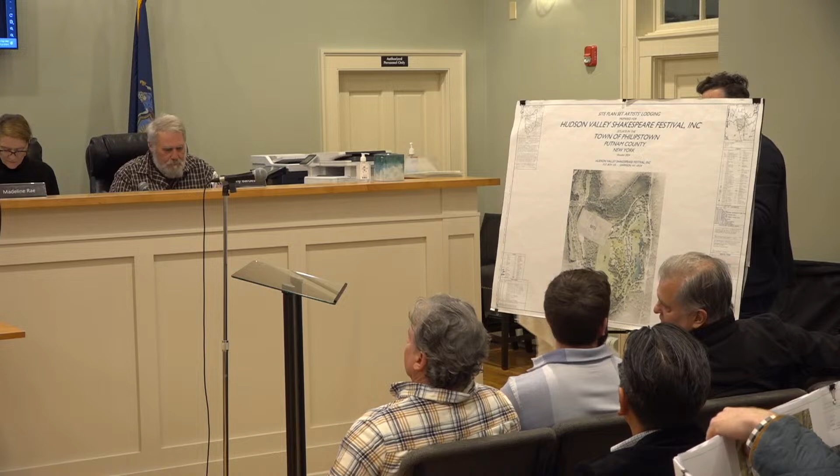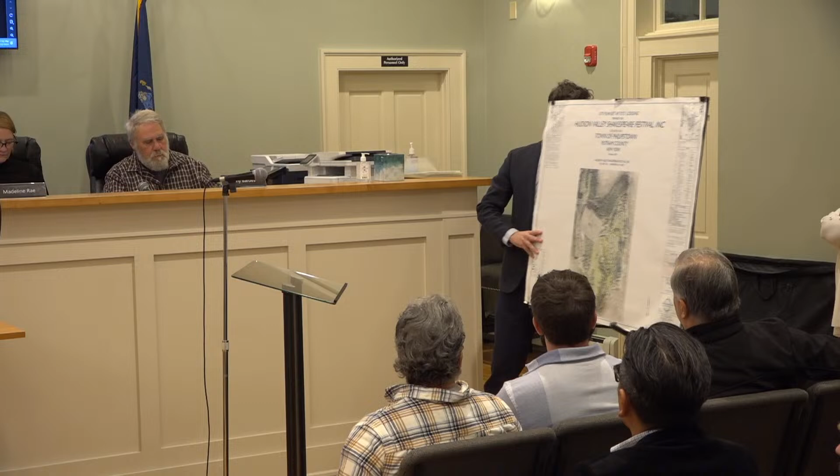What's being proposed is 32 units of artist and guest lodging. There's no conservation board jurisdiction. I think the planning board just wanted to make sure that you guys were kept apprised of what's going on site.

This is the area of the theater being built over here. This area over here, and I have a blow up of it, is where the artist lodging is going to be built. It's 32 units in 5 buildings. Just to orient you, this is Snake Hill Road here and Philipse Brook Road here.

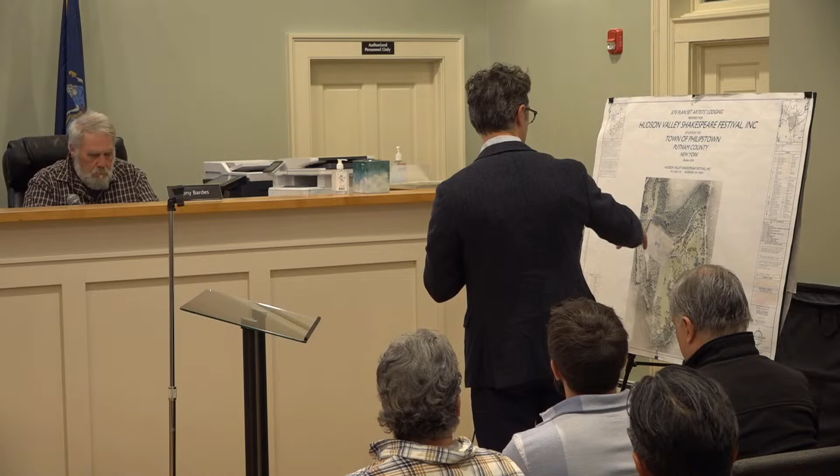So what's being proposed here are 16 units of lodging in a 2-story building here, and then 4 units each for another 16 units in these 4 buildings here. This is all being proposed on a former fairway, so there's no real additional disturbance associated with this part of the property. So again, just to orient, this is north this way.

Snake Hill Road's over here. Snake Hill is to the left. Yes, to the west. So are there any questions? You took the words out of my mouth. Does anybody have any questions?

No disturbance, is there tree cutting that's going to be in addition? I believe there are 2 trees planned to be cut as part of this construction, and 32 are being planted. But it was proposed for an area of the site that was already disturbed at the fairway.

And it's pretty far off the road. You can see that there's a slope down this way that leads down, and there's pretty heavy tree cover that separates this area from the neighboring properties. So most likely this is not going to be visible from Snake Hill Road.

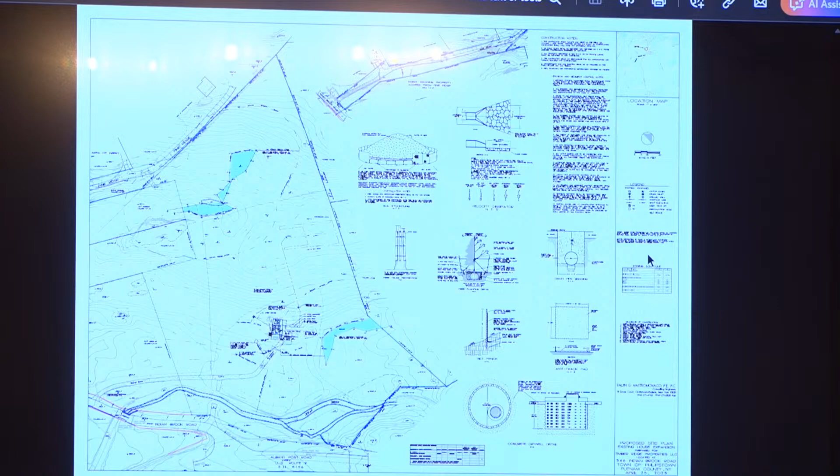The first application, or wetlands permit, is the map displayed for an existing residential house. The house is under renovation, and as part of that they need to do exterior work on the property. The work would be within a wetlands buffer, and the impact to the buffer at the existing house is approximately 3,300 square feet of disturbance. That would include where an existing septic currently lies, and where the existing house is. So they are basically working within the confines of the previous disturbance, but upgrading the property.

Okay, now, other than the septic, what else? I was unclear looking at the application. What else is being done to the house?

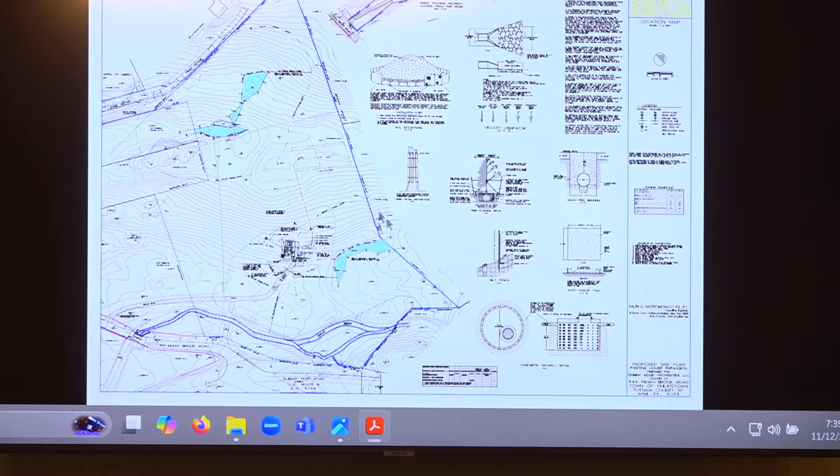So the existing residence has been expanded. The foundation has been expanded slightly. There's been some exterior improvements, like a patio, and other improvements made. A lot of it was old and decrepit, so they're basically trying to upgrade the outside as well as the inside of the property. But it all is within the proximity and within the previous disturbed areas on the property for the existing house.

So there's no expansion of the footprint of the existing house? There is some expansion, minor, of the existing house. They're putting a second story on it, but I believe some of the perimeter walls are being improved upon due to the age of the property. It's a very old house. But it's not a significant increase in the footprint. It's more they're going up, but there is some exterior expansion.

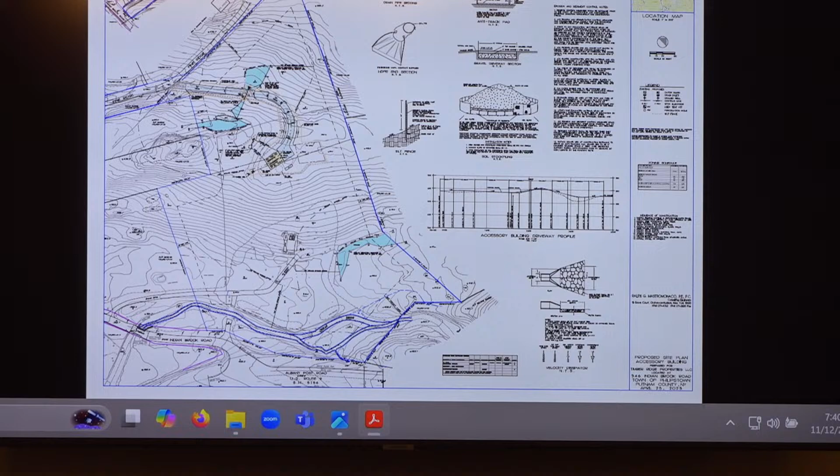Now, the second application before the board is for an accessory building, shown on the currently displayed map. The accessory building has additional impact due to the installation of a gravel driveway, and the driveway crosses an intermittent drainage channel, which will be crossed with a culvert. The impact on the accessory building is approximately 346 square feet of wetlands disturbance and 11,300 square feet of buffer disturbance.

The two, you can see on that plan, are in relationship to each other, one sitting at a higher elevation than the existing house, but they are both on the same tax lot.

So I think we were here before the board to progress the project, to see if we could schedule the board to make a site inspection. We need a site visit.

And the other thing is, lack of a better term for it, I'm assuming the property goes further this way, to the north on the map. There's a- it basically goes further to the north. To the south, to the south, yes. Because I don't know how everybody else feels.

I'd love to see - you're basically building a new driveway on a private road that I assume the property owners own in its entirety, but I think that needs to be shown. It actually is shown. If you see the way the map is described, the tail end, this is the insert at the top? That's correct, yeah, that's the extension, but the bulk of the property is shown on the left. Yeah, I see that. You can just see where the match line would line up. Yeah, it's not particularly clear.

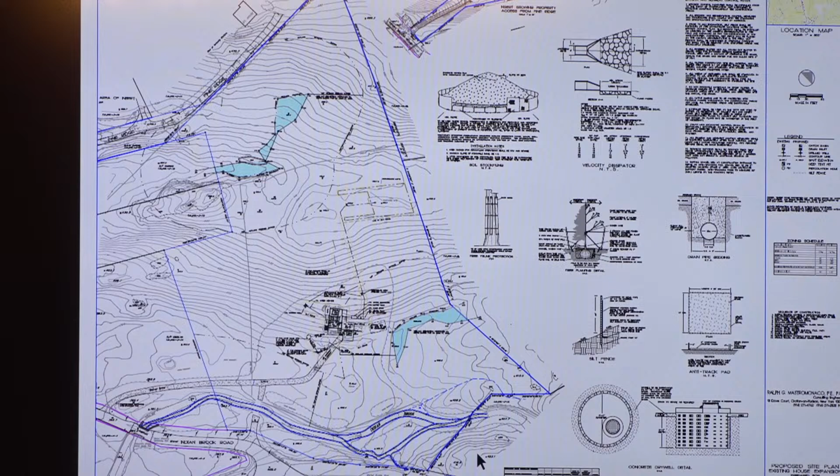Could I ask, is it possible to get copies of this with the type about three times bigger? Yeah, I mean, I'm old, but I don't think I'm that old. As much as we don't like wasting paper, we are used to seeing full-size plans. We certainly could provide that. I think that's important. We need to do a site visit.

And also, my eyes are pretty good, but it's really hard to tell if everything is on this plan that needs to be. I have a feeling it is once we see it blown up, but in terms of silt protection and so on, if we had a bigger plan, we'd be able to see that.

No, that... Okay, so we do have one set of plans.

Member Bardes had asked if the access road was going through another property, but in fact Pine Ridge Road is owned by the applicant. Pine Ridge Road also goes into Indian Brook, ultimately, intersecting at Indian Brook Road.

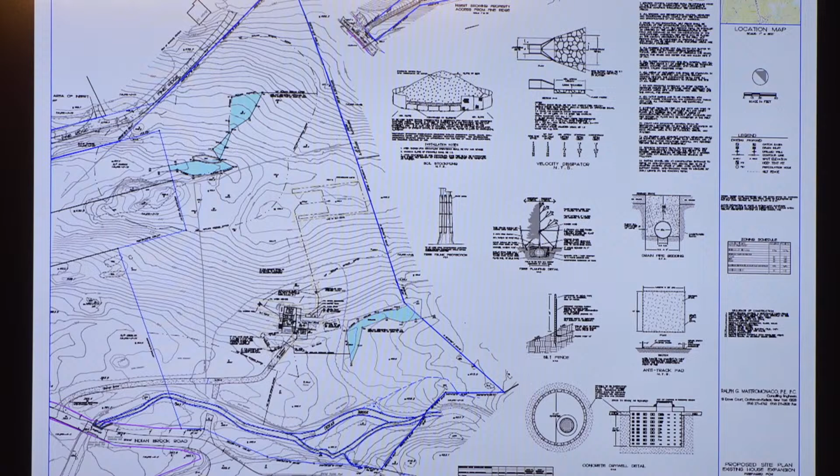Okay, so we have one set of full plans, which is from the old one. So I don't know what comments or questions there are, but I do think this begs a site visit. I believe, Max, you had told me that everything has been staked out?

Yeah, I went over to the property on Saturday and met with the owners preliminarily to look at the layout and kind of give them an understanding of how the process would go before the board.

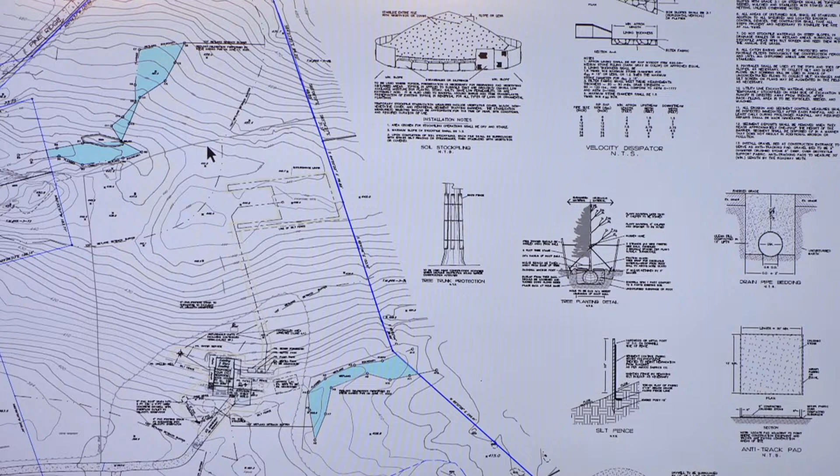So I think maybe now would be a good time, if you have anything else to add or would like to share with the board in terms of the intentions of the property and what the accessory building would be utilized for. I think those would be good things to keep the board informed about, if there's any other information regarding that.

Yeah. So, as you see, there are 2 brothers that own the property jointly. Their intention is to develop it to have 2 living quarters on the property, one of them existing and then one of them proposed.

The proposed building, the new one, is proposed to be just a 2-bedroom loft with a garage underneath, similar to like a small barn. That's actually the style, so it would complement the main house. It would look like an accessory building on the property.

Due to the grade change from the existing house to the level area up top, they found it prudent to include the access off of Pine Ridge, as opposed to trying to navigate the steep slopes on the property.

So that was the concept, and the fact that it looks like a relatively easy access, with focus on the environmental crossing of the intermittent channel. We believe that it would make the most sense to access it in that manner.

Now, is there going to be some form of at least pedestrian egress between the existing residence and this new residence? As of yet, that hasn't been an issue that came up. They're young and active, maybe they don't want it to be too close for comfort, but if in fact that is a plan, then we would reflect that on a site plan. Right now, there isn't any intent to do that.

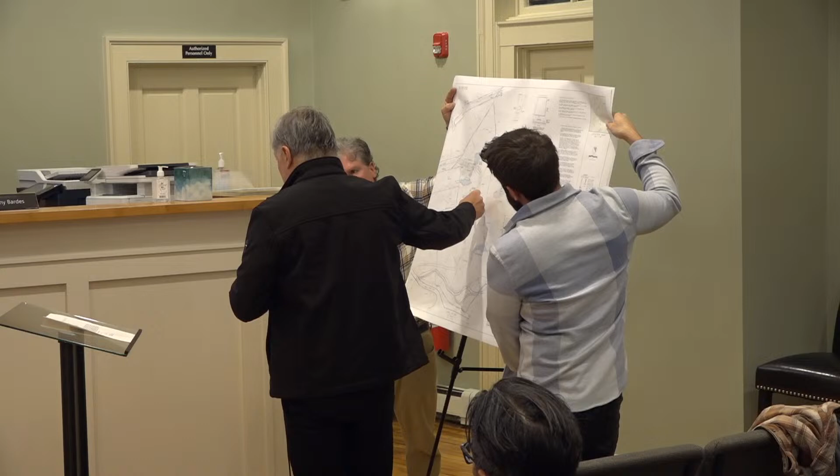At that location there's a proposal to include both a septic for the accessory building as well as the septic for the existing dwelling, which sits at the bottom of the hill. The septic currently has to pump up the hill, and it currently sits within a wetland setback buffer. It'll be eliminated and relocated up on top of the hill.

However, there are improvements taking place within the buffer for the existing house, including a patio, a portion of the foundation, and a septic tank, but that's minimal work down at the existing house, which sits closer to Indian Brook Road and Route 9.

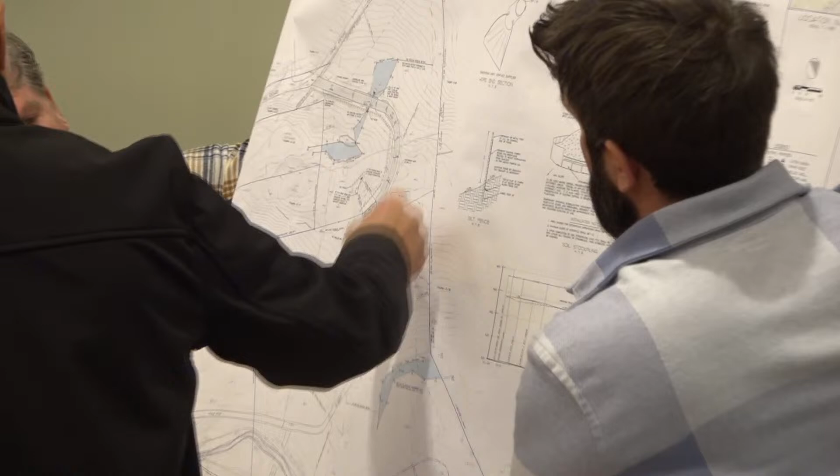At the top of the hill, we have the new proposal. All of the improvements here are new, including the driveway, the two-bedroom accessory barn-type building with a garage below, and a small— Is that a separate lot up there with that blue line that goes right through the house?

No, above that's only a setback line. Okay, so it's all part of one lot. Yes, it's all part of one lot.

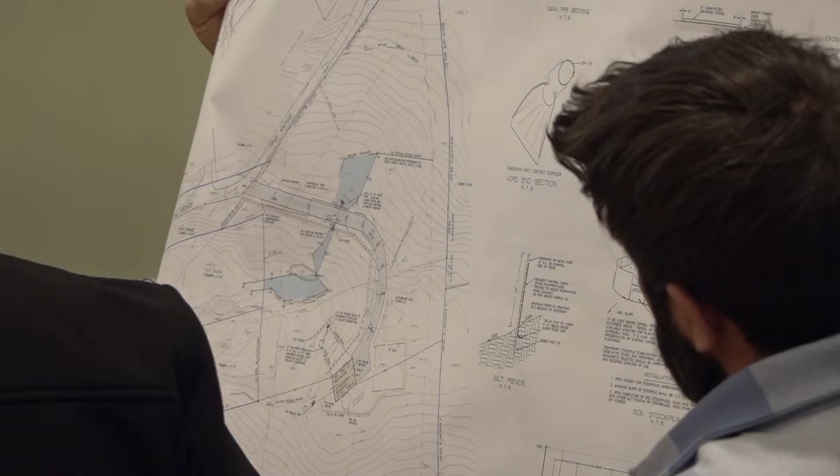The acreage is 7.2 acres on that particular lot, and the reason we're here before the board is partially because of the wetland crossing here. This crossing is where the driveway will come over, and we're installing a culvert pipe, and we will divert the water beyond it, and it runs down to a lower wetlands that feeds back off the property.

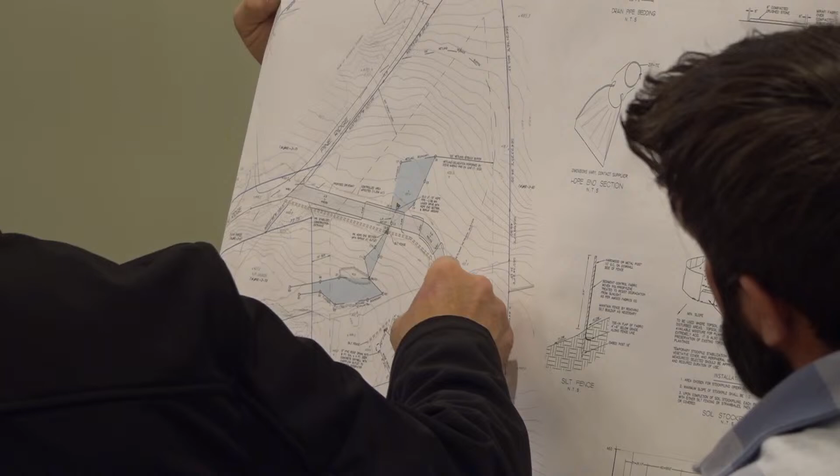So the improvements to the house and to most of the driveway are outside of that area, but there is that portion of crossing that requires us to be before the board. But it's not improvements to a house, because that's gonna be a new house, right? So that's outside. The improvements that are within the buffer include the driveway and a culvert crossing pipe.

And approximately 3,200 square feet of buffer disturbance for the accessory building. And how big is the accessory building? I asked before but I didn't hear. I think it's approximately about a 40 by 27, not gonna exceed 1,000 square foot.

Right, 1,000 square feet. And with the health department, are they okay with that septic design you got there? So the health department has reviewed the application, and they've provided us with a letter stating that the review has been completed, and upon receipt of a wetlands permit from the town, they will issue the septic approval. That's the protocol that they follow.

We gotta go there. So I'm just looking at the contours of the driveway. It looks to me that at worst we're on steep one category, steep slopes. No, it's not. There's a driveway profile, note. The grades are from 1% as steep as 8% for one small portion.

But basically what's happening here is the hill's going up, we're traversing the hillside, so we're running at a relatively level grade until we come around the bend, and then we climb up a little bit, which is represented there.

So we tried to work within the setbacks, which we do not require a variance for, but we do have to get your permission to allow us to put additional footings to build this deck.

So the disturbance is about 82 square feet, which entails a small patio at the bottom. That will be about 395 cubic feet of disturbance. In reality, it's just the disturbance of the footings, so we're talking about 9 or 10 footings that will have to be placed.

So that's the ask for tonight, if you guys will be able to modify our previous approval from two years ago.

Yeah, just refresh my memory, I remember doing a site visit there. Originally, they were going to extend the house slightly, if my memory serves me. So more or less on the front, we were going to be squaring off the front entrance, expanding that, creating a portico. And in the back we were creating a suite.

So we were extending about 9 feet, plus the width of about 20 feet on the back, I believe. I apologize, I printed this out today just to give you an idea of what was proposed, so you don't have that in the presentation. That's on me, unfortunately, I'm sorry.

This is, the yellow portion is what was approved previously. What you have in front of you now is pretty much a lot less, which should be in either the first or second page for you guys. That's the site plan, and the other one is just showing the footing locations. Just to give you an idea, again no addition, but just more of an outdoor space area to the house itself. And the entire house, if my memory serves, is within a wetland buffer.

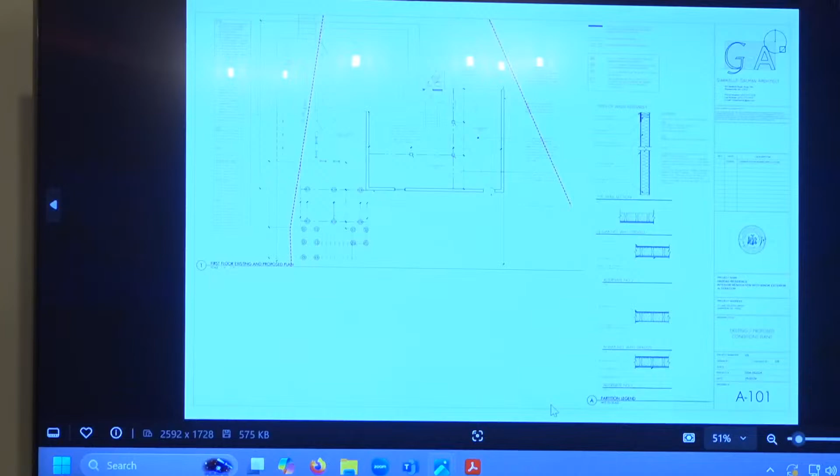Did the board propose any mitigation requirements for the project? The only one we had, and we wanted to keep, if it's up to you, we had a swale that we were creating, and we can definitely replicate that. We want to keep that as part of the approval. It's not reflected in here, but it's also part of the previous approval we obtained.

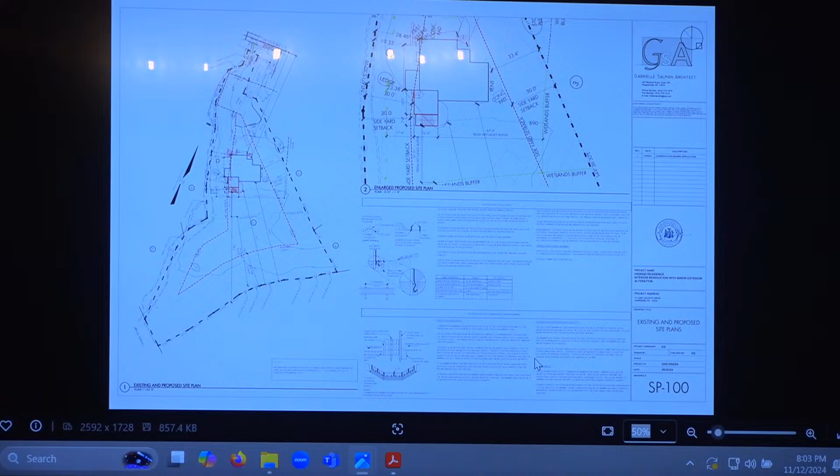So swale, remind me, it's pretty much just more like a green garden in a way. Was it a rain garden that we had proposed? Correct. And that's the green line in here that was part of what was previously approved. We wanted to keep that, that's the reason we didn't include it in here. We're not deviating from what was done previously.

So this is an interesting issue, I won't say a problem. I think we need plans that merge what was going to be done in terms of mitigation with this. And I think also the area of disturbance, to me, is the full deck, not just where the footings are going, because you are covering over the land itself. Even though the patio was part of the previous approval? Okay, yeah.

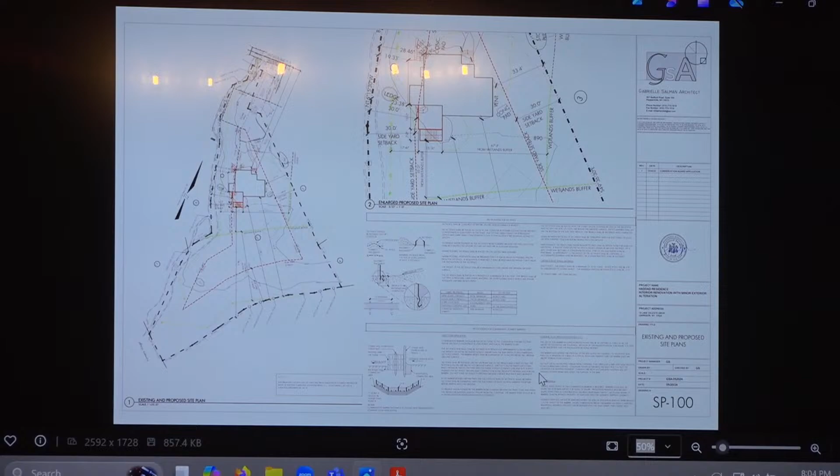Because basically we're getting rid of the old plan, it has to be a new application, right? But what I'd like to see is what was incorporated, so we're not taking anything for granted in terms of mitigation on the new plan. That make sense? So overall, the square footage of disturbance is less.

Right? For me, disturbance is what you have, and that's something you and I talked about last time, so just for my clarification - disturbance last time on this project was what we are excavating and what we are controlling. Right now, the disturbance is literally just the footings, not the deck itself.

So when I do the revised application, which we did, I just have to provide the additional plan. So you want me to include the deck, which will be an additional square footage to the disturbance, even though that's not being excavated - just because it's being covered.

Is the deck a similar square footage to the addition that was proposed previously? It's actually less. So I think that needs to speak to Andy's point - to show that the mitigations we were comfortable with moving forward with a larger square footage of disturbance will still be proposed to deal with less disturbance overall, even though you're only considering the footings as the disturbance, we're creating that whole footprint of the deck space.

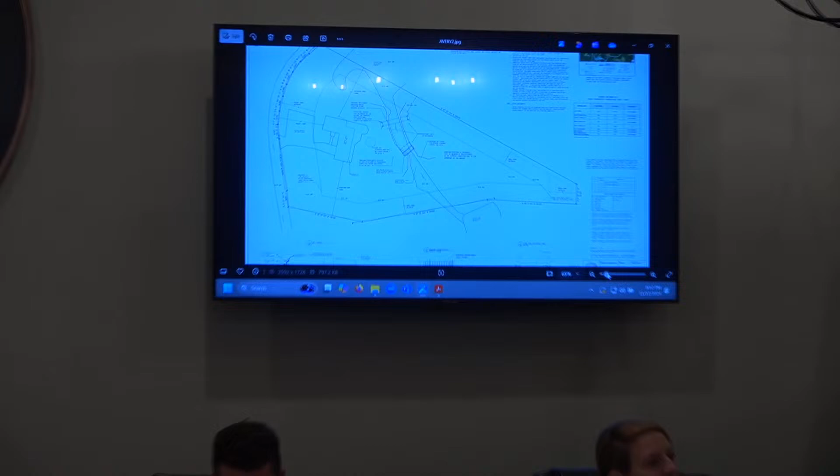It seems as if maybe the whole system was man-made at one point. The DEC doesn't even have it on any of their maps. I called the DEC and reached out to them specifically, and they said it's not a regulated stream. I've been there, and the stream itself doesn't really seem to be flowing at an incredible rate. I'm sure when it rains, maybe there's some flow.

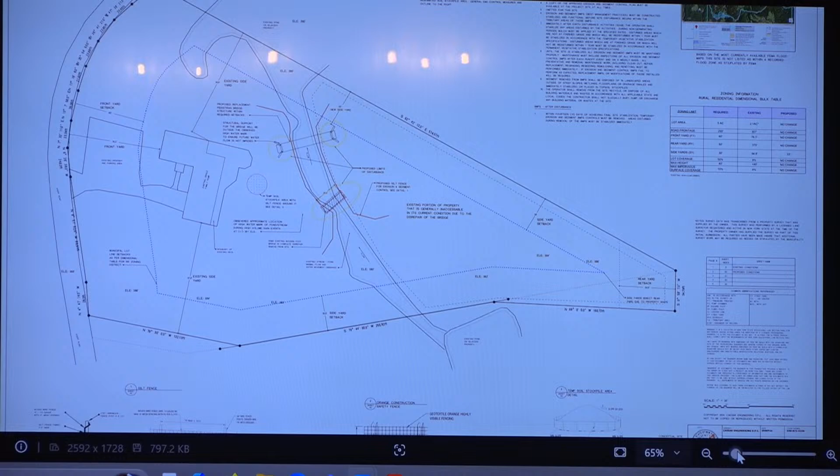Generally the flow seems to be from this side to this side, but that's really the situation. The existing bridge is not really passable with any respect. The property owners, for all intents and purposes, don't have access to the back of their property because of this bridge that's basically falling into the stream. The condition of the bridge is such that it actually impedes the flow of the water.

It's kind of an issue, and when the water floods, this is actually not in a FEMA floodplain because it's not really an observed or tracked water body, but the general 100-year flood zone, just from the property owner's personal experience, is roughly at 381 feet, just meandering around here. When the bridge backs up, it causes more of an issue.

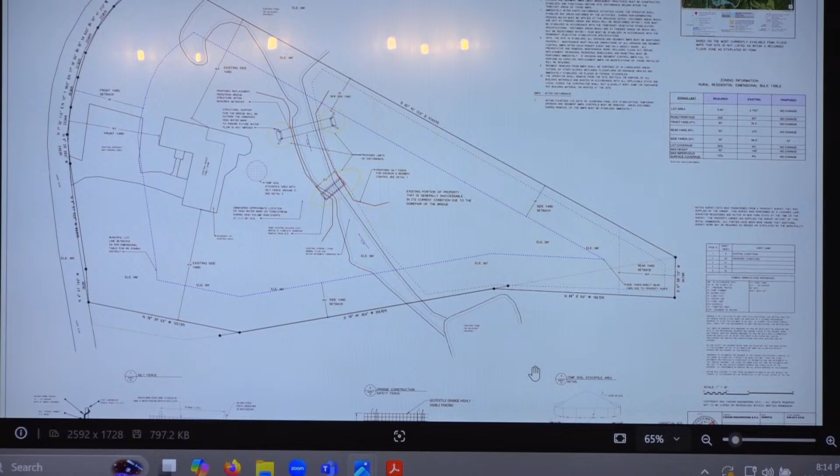So the general proposal here is simply to remove the existing bridge, relocate it above the observed floodplain, in this general area within the setbacks. The intention is to perform all excavation activities outside of the boundaries of the physical water body. So we would be basically pushing the bridge piers out probably 10 feet from the mean high water mark on each side, putting in 2 footings on each side and then putting a steel girder.

The intention is for it to just be a pedestrian bridge. There's no intention for vehicular traffic or anything like that, but the property owners basically just want access to the opposite end of their property, which currently is inaccessible. So the new bridge is being moved because you want to put it in an area where the stream is not constricted. Yes, we don't want it— the grade is such that there's kind of a little knoll here, and it's a particularly convenient location to set the bridge up higher.

So we're basically trying to get 3 foot of freeboard above the existing water mark, so that if there's a flood stage event, the water is not being constricted by the bridge at all. So the intention here is to really remove an impediment from the stream and make sure that whatever bridge is there is basically not interfering with the water flow in the future.

Where's the proposed moving bridge? The existing bridge is here, and the newly proposed feature is just basically 30 foot next to it. And I'm guessing that the width of the bridge now, the new bridge would be about 10 feet? The width of it, yeah, it's gonna be like 4 foot. Okay, because if I'm using it to scale, it's much wider than that.

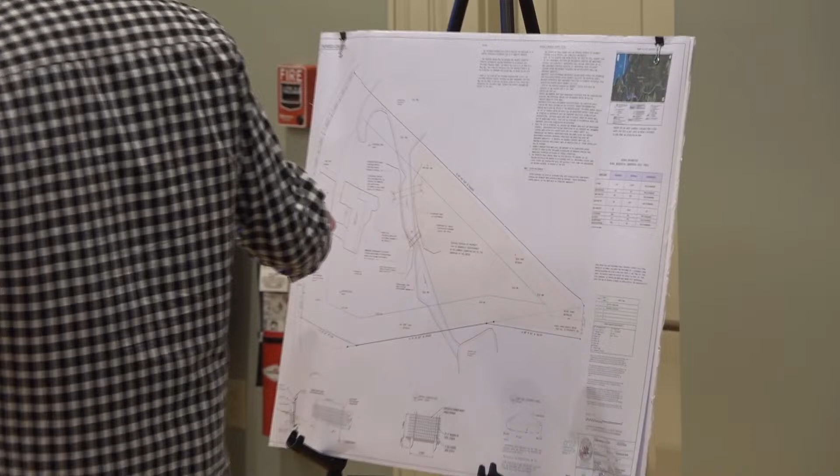How wide's the span across the stream? In order to get beyond the high water mark and the flood area, it's gonna be like 30 feet plus or minus. So we'll need that revised on the plan so that it is within scale.

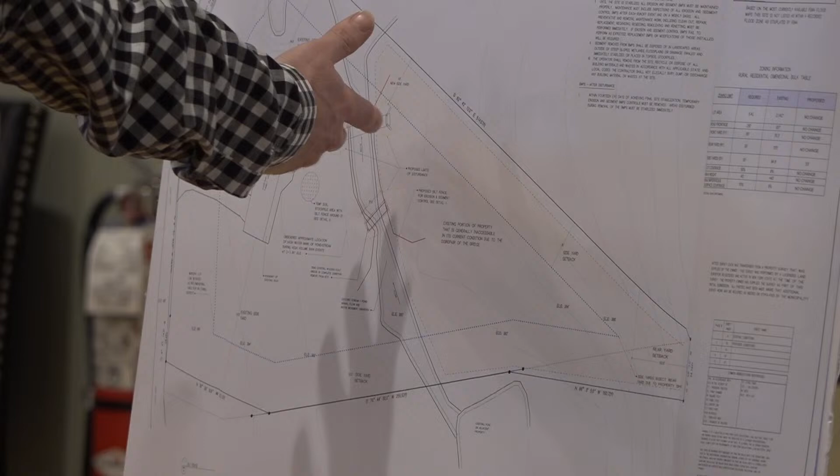Because right now, looking at your plan, 1 inch is 20 feet, and what you have the bridge drawn where the width of it is well over half an inch. Yeah, I mean, the bridge has not been designed yet, so it's just a general area occupying the location that the bridge would be. The bridge has not been designed. So generally, the bridge's span would be about 30 foot. It's gonna be a pedestrian bridge, probably 4 foot in width.

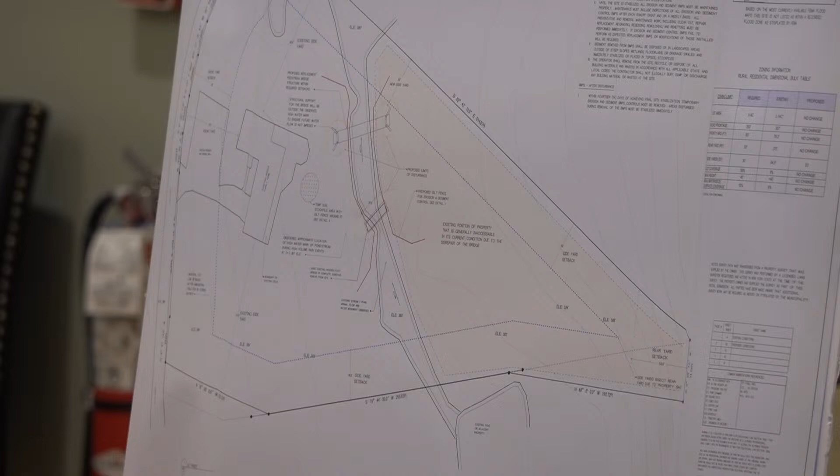Okay, so we were looking at the DEC mapper, which at times is incomplete. The question is, does this feed into a New York State regulated wetland? I reached out to the DEC specifically, and they said they don't have any records about this particular water body. It's not on any maps. It comes up on your EAF as it is a regulated water body.

Okay, I have email correspondence specifically with the DEC, and they said that they are not aware of it, but I can look into that a little bit more. 'Cause what that would mean is, we would need to see the correspondence. If it is regulated, then you're also getting a permit from them. Yeah, and normally, they'll give you a permit after we give you a permit.

I do think also, do we want to do a site visit? I think it'd be warranted. I think it would be effective, just so you can see what's going on. I'm totally fine with that.

The particular location of the proposed bridge is really subject to change, it could be anywhere in the vicinity of this. We are gonna need, once we do a site visit, more complete plans in the sense of what's the size of the bridge, width of the bridge in scale, the profile as well, because in this case, you're raising the bridge for a particular reason, which I think is beneficial.

Did you share what the footings are gonna be for the new bridge? We've constructed bridges like this in the past. Basically, they're just 2 sonotube footings on each side of the bridge, so 4 total, probably 24 inches in diameter. And then it's roughly 30 feet. Yeah, we'll put 2 steel girders on it, and then just a wood decking with some railings.